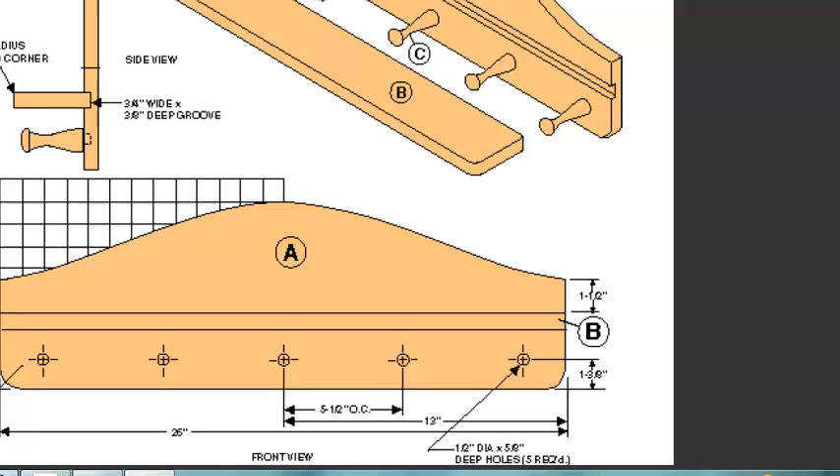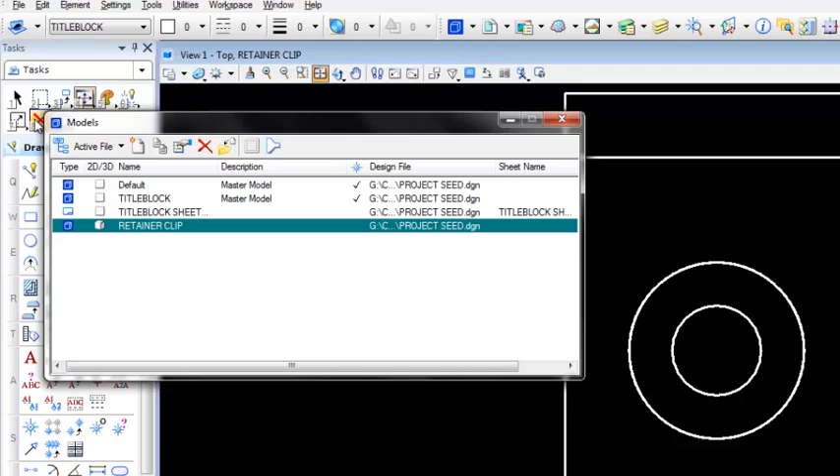I'm going to open up my MicroStation in a project seed file, and I think for the sake of getting this moving along, we'll create just a 3D model. Looks like I already have one here. Let me just see if there's anything in that. No, I think I'll just rename this. I'm going to make sure there's... oh, there is, I think this was one I mistakenly started without. We're just going to rename this to 3D model, that way we can use it whenever we need to.

We'll do a file save, and now we can do a file save as. Our last project was project 7, so we'll call this one project 8.

I'm already in the 3D model, so we'll move up to our solids modeling tool first of all, because most of our drawing tools will be right here anyway. And let's draw in the isometric mode like we did previously, so I'm going to change my view to isometric.

Let's create some new levels. I'll rename this retainer clip to, let's call it, part A, back. And then we'll create another new level which will be part B, shelf, and then part C will be peg.

Alright, so we'll make the back board our initial drawing, and we'll go take a look at our file. We've got 26 inches long. The overall height from the very top to the very bottom is 9.5 inches.

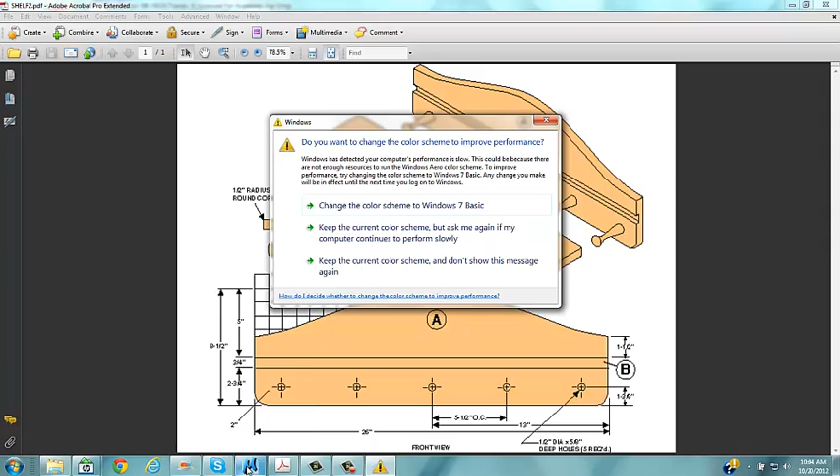We're going to select our slab tool. We're just going to left click anywhere on the screen here. Well, before I do that, let's just double check the design file working units - this is in meters. Good thing I checked. Let's go to fractions. The smallest fraction I see here is probably going to be, let's go to a 1/16 of an inch, just to be sure, and we'll say OK.

Not sure, just do a file save settings. So I want to make sure I remember that that was in meters on my project seed file.

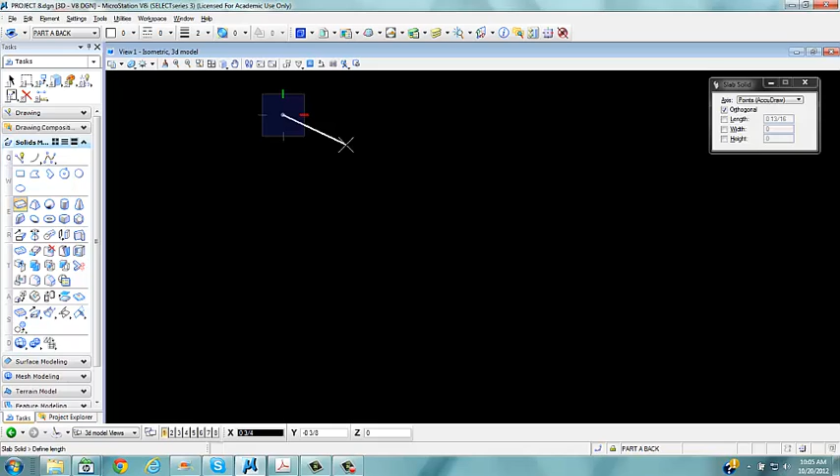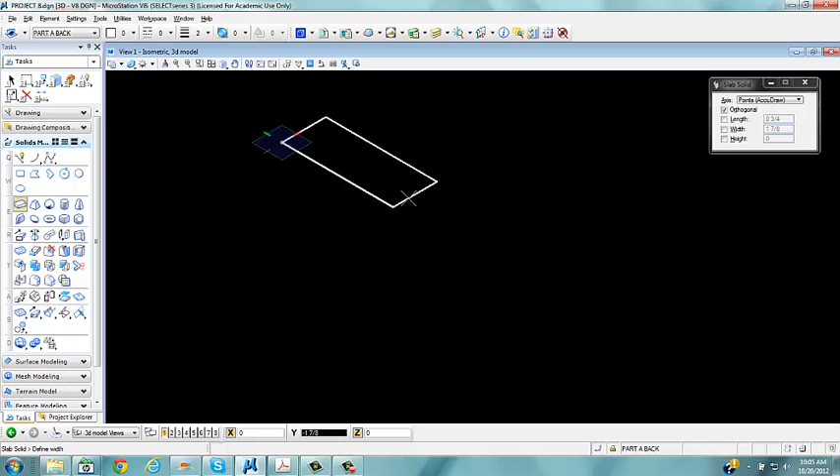I'm going to hit my T key for top. We'll put in the thickness first, just going in this direction, and it's going to be 0.75. Whoops, not sure what I did there. 0.75, there we go. The length is going to be 26, and the height is going to be 9.5.

Do a fit view, so there's the backboard of our object. Now I want to roll this around to a front view. Oops, guess I need a right side view. There we go, so we know we can find the center point.

And if we look back here at this, and I've written some notes out here, but we need to draw this curved line, so we're going to attempt to do that first with a Bezier curve or some type of curve. So we've got a point we're going to start at up here. If you notice, you go over 5 squares, and each of these is 1 inch.

So we go over 5 and down 1 for this point, and then we can go over 3 and down 1 to obtain this point. And then we'll go over 3 and down, say, 1.1. And then we're going to go over 2 and down 0.25. That should give us pretty much this curve.

And this is set up so a carpenter can lay a grid pattern out and kind of find these lines. So it's not exact, it's just kind of a design on the top. So we'll go back to MicroStation.

And let's select a, let's see, probably - let's try a B-spline by points. We haven't used this, but this will kind of give us a nice smooth line. So we'll start right here in our center.

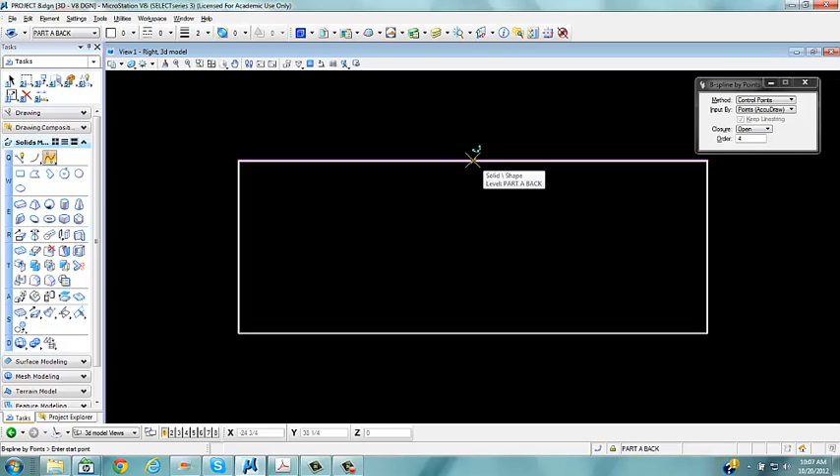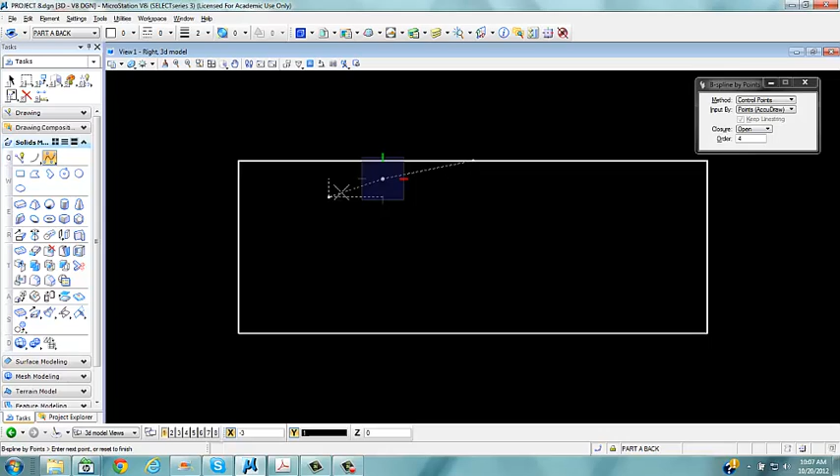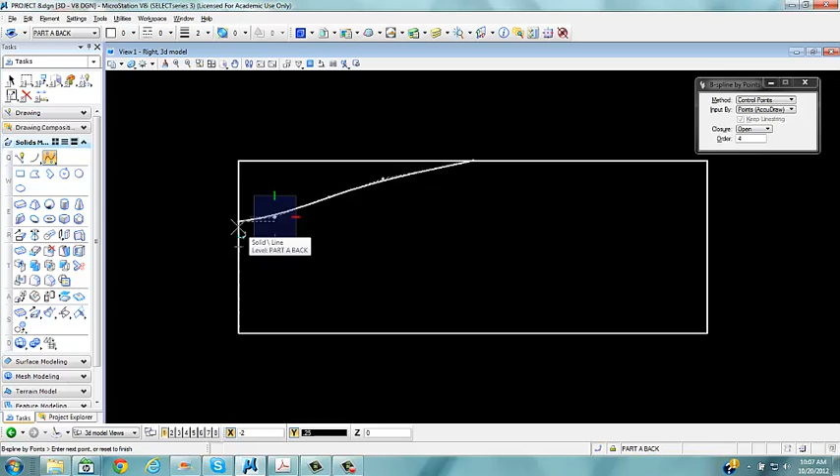And we're going to go over 5 and down 1, left click. Then we're going to go over 3 and down 1. Then over 3 and down 1.1. And then over 2 and down 0.25, left click. I'll extend a line out here and then right click.

So that kind of emulates that line. Now if I take my smart line and connect this point all the way across to the center point, hit the enter key to lock it in.

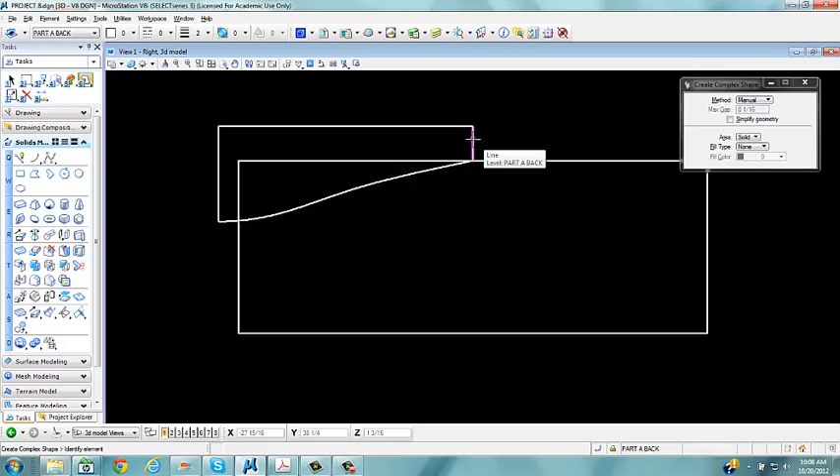And now I can take this and create a shape. We're going to take our 6-3, create complex shape. You can do this manually. I'm going to select this, the curve, this piece, and this piece. Left click. And then take our 3-5 tool, mirror. We want to make sure we do it about a vertical axis and click on make copy.

It's going to kind of give us a little bit of a peak there, isn't it? That's okay, we'll round that off in a minute. So the next thing we can do is boolean those two shapes together in our 2D modeling tools and actually create that as one entire region.

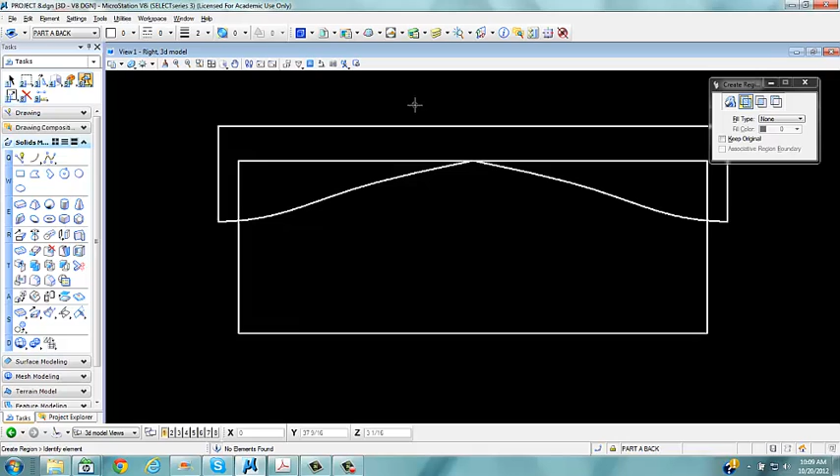If we rotate this back now to an isometric view, we can see our two-dimensional plane and our board, and we're just going to use our T cut solid by curves all the way through. Just left click on the board, left click on the shape, left click again, and it makes that cut.

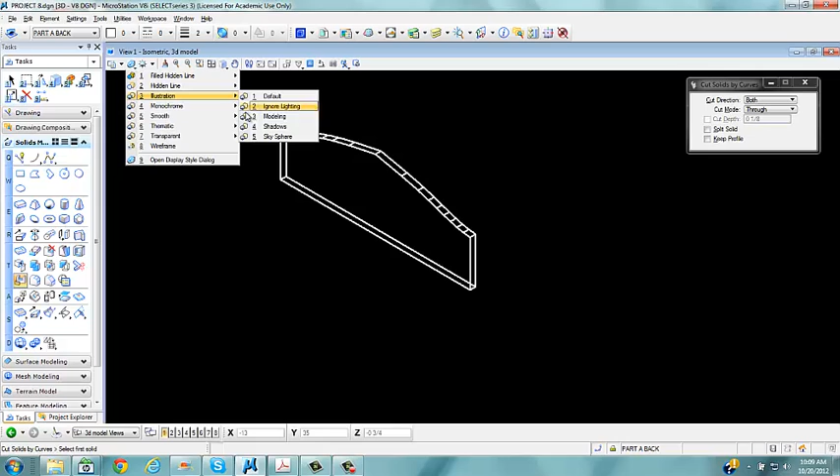Now if we're looking at this in a rendered, say an illustration mode, we can see we've got this little peak on the top. I'd probably change that and maybe put a little radius on that. So we'll use our fillet tool, and let's try a 4-inch radius right on that peak and see what that does.

That's better. So if we rotate it to a right side view, yeah, that wasn't quite enough. Let's try an 8-inch radius. It's going to make it a little shorter, but that's fine. I think that's better, look at it in right side view. Much smoother now, so we've kind of emulated that piece.

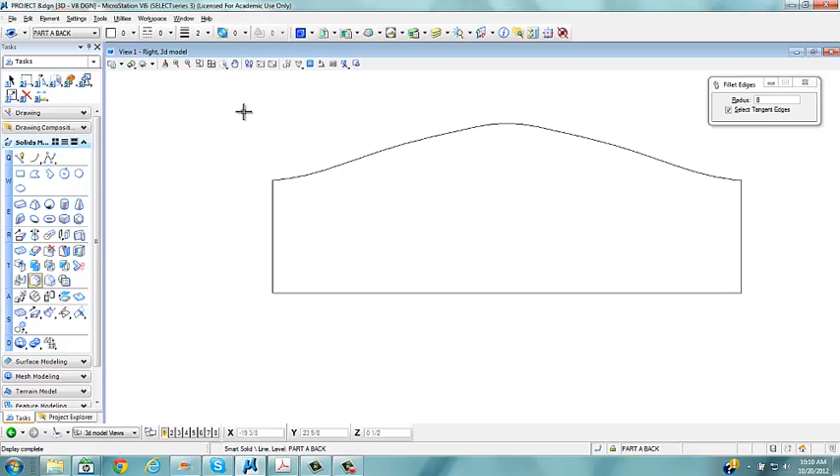We'll rotate it back to an isometric, and we need to cut a slot. If we look at our view, we have a 3/4 inch tall by 3/8 inch deep slot that our shelf is going to fit into.

I think we may need to make an adjustment where we rounded this top off a little bit more. We may have to extend the board down so it becomes the actual 9.5 inches.

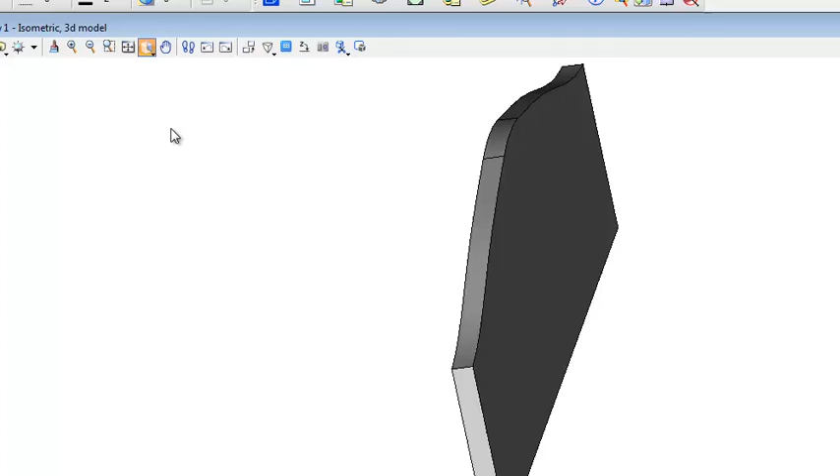So let's go back to our MicroStation. Look at this in a right side view again, and look in wireframe. So I know the distance from here down to the bottom is supposed to be 9.5 inches. And you can see how that extended down below because we rounded this top off, just to make it more accurate.

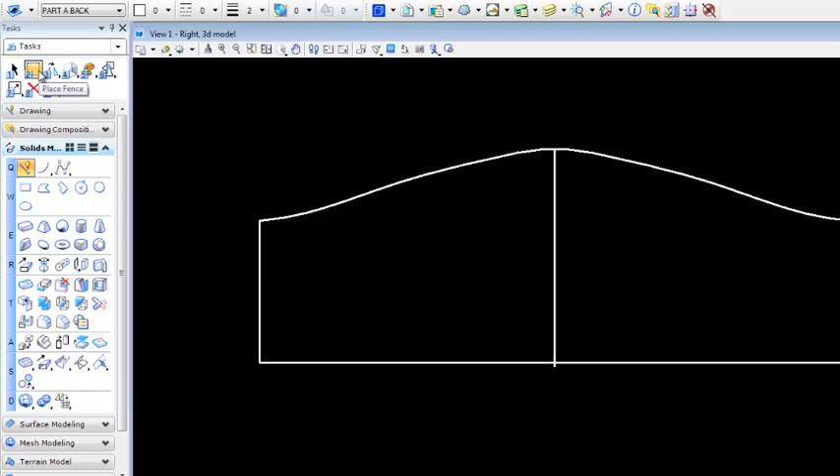Now this is the first time that you'll have used this tool, other than the fact that I may have used it over your shoulder to try to correct something, is your fence tool.

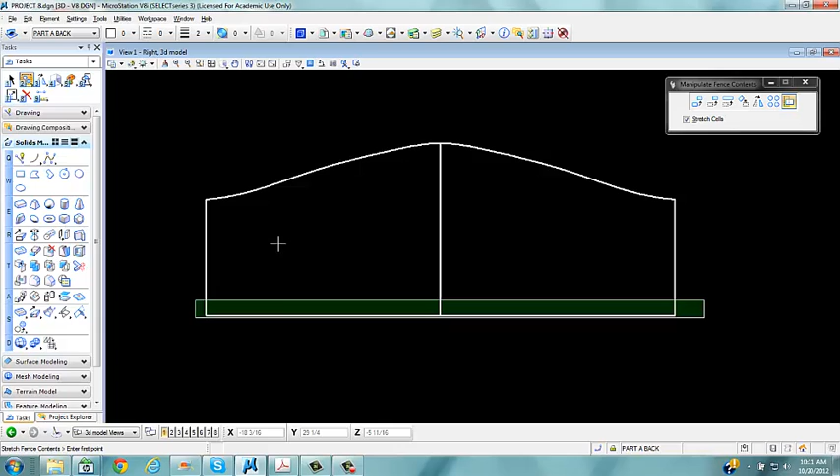We can use this just creating a block, everything on the inside. So I want to create a fence, which is just an invisible line. And what I can use now is a manipulate fence contents, and I want to stretch it. So I can just take this bottom corner, pull it straight down, hit the enter key, and just lock it to this piece. You see what that did is it stretched that piece down.

Now that's one way to do it with a fence and manipulating it within the fence. The other way might be, if I undo that, is just select the object, grab a corner, pull it straight down, hit enter, and then just lock it. And it will do pretty much the same thing. But the fence tool is able to take a specific area and stretch it or copy it or rotate it.

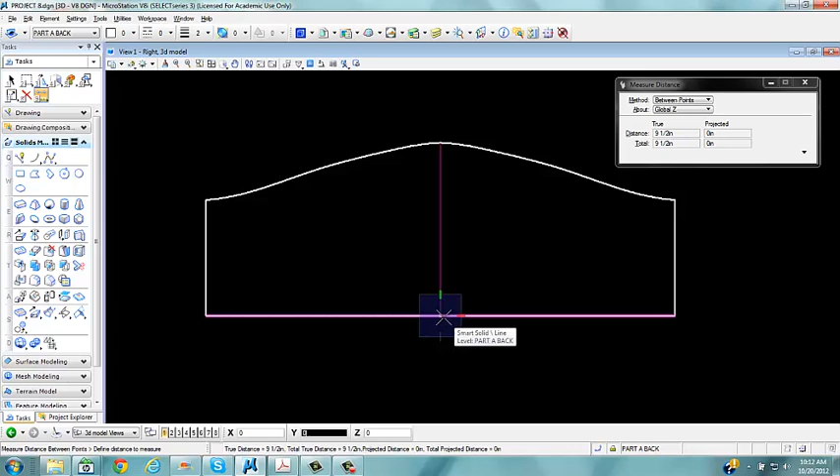So now when we look at the distance using a measuring tool between points from here to here, it's 9.5 inches. So we just made a little adjustment there to kind of make things right.

Let's rotate this back to an isometric, and we'll take our block tool to place a block. Left and right mouse button, tentative point, hit O, and I need to hit F because we're going to go up a distance of 2 3/4 inches.

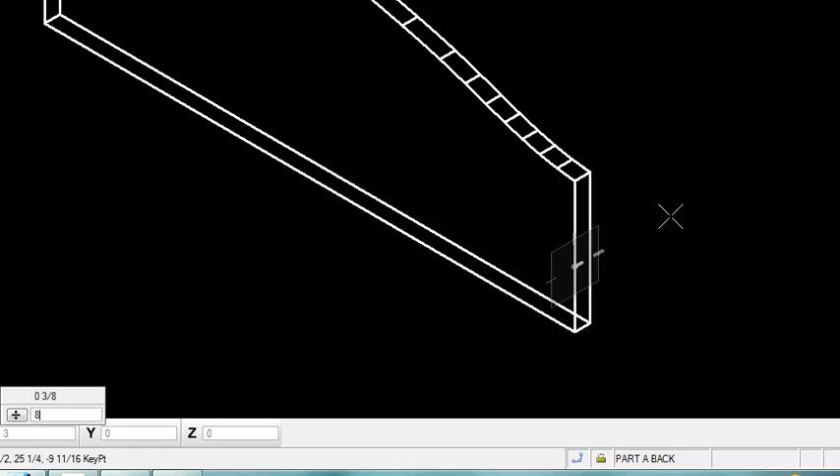2.75. Left click. We know that the distance in is going to be 3/8 of an inch, so I'm just going to key in 3/8. Too lazy to figure out what the decimal equivalent is. Move my mouse straight up, and the height of this is 0.75, 3/4 of an inch.

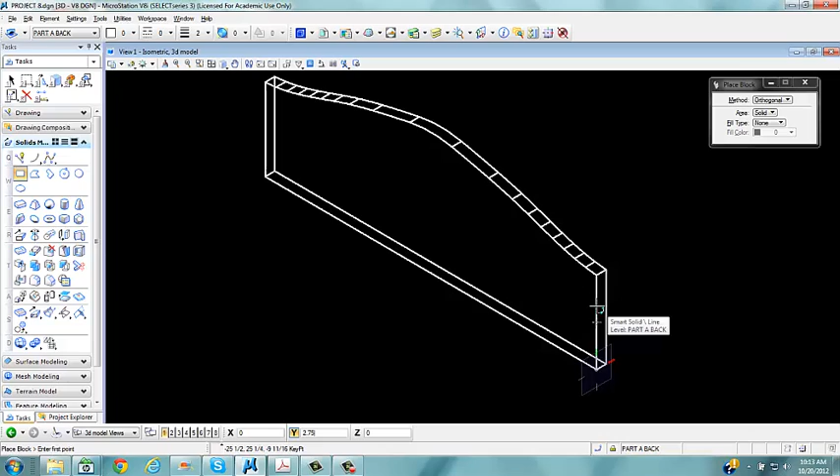Looks wrong. It is wrong. Don't know why. I hit a divide sign, I guess. Try it again. 2.75.

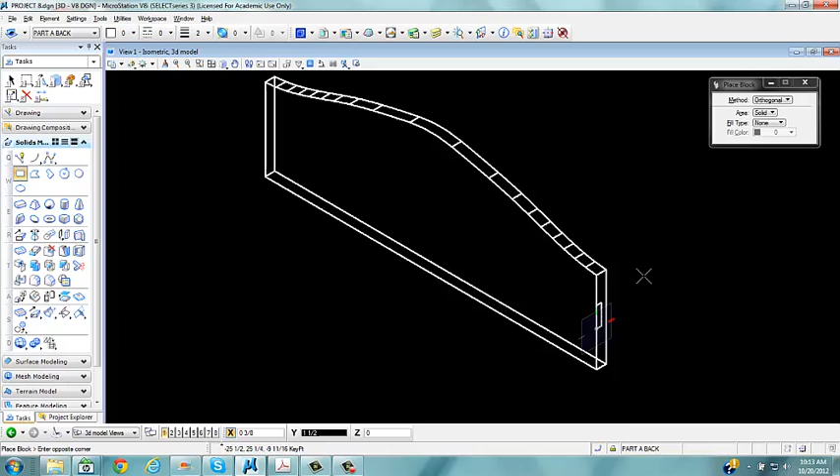And point. Whoops. Stuck down here in the divide. You got to click over into that box. Now key in 0.75. There we go.

That looks better. So now we're going to take that shape, do a cut solid all the way through, this to this, and there's our slot for the board. Now we'll rotate this around to a front view again.

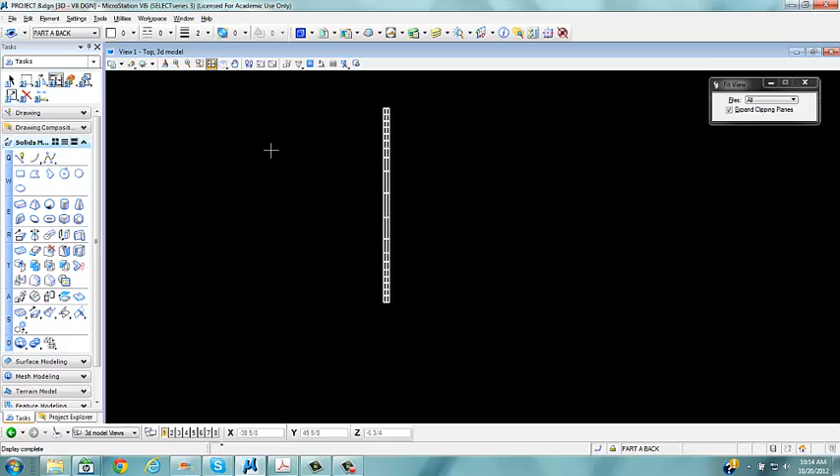Whoops, sorry, keep getting it wrong. Right side view. You know, it'll probably be easier for me to just put this in isometric, and I'm going to rotate this thing 90 degrees.

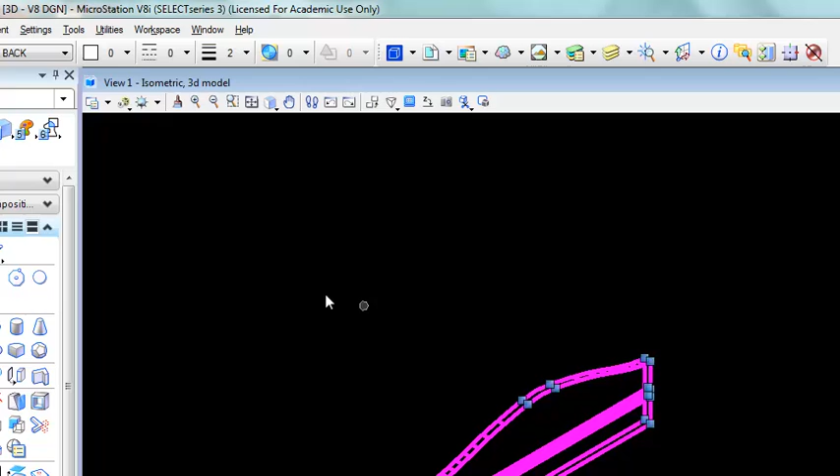Sometimes you have to make sure your compass is right first. There we go. Now when I go to a front view, right side, I'm looking at the face of it. So it's a little more oriented correctly now.

We're going to take our circle tool and find the center point, which is right here. We know those holes are going to be up 1 3/8 inch. So I'm just going to left and right mouse button, go straight up, 1 space 3/8, 1 3/8 inches.

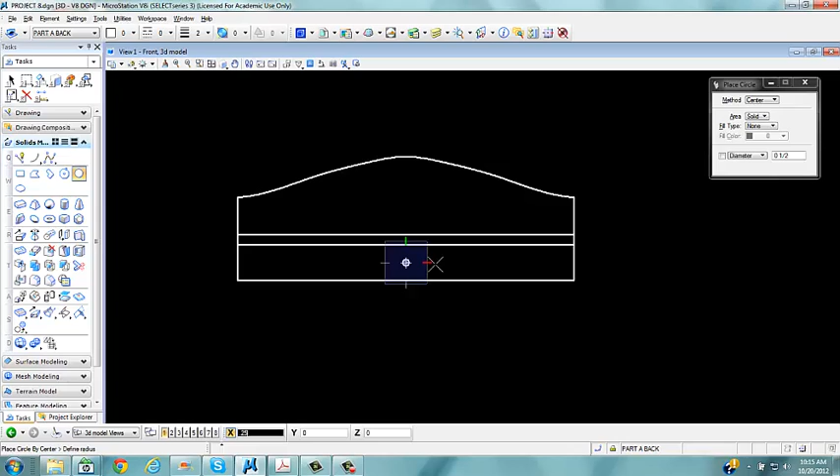The diameter is 1/2 inch, so we're just going to key in 0.25 or 1/4 inch. And those are going to be spaced 5.5 inches on center.

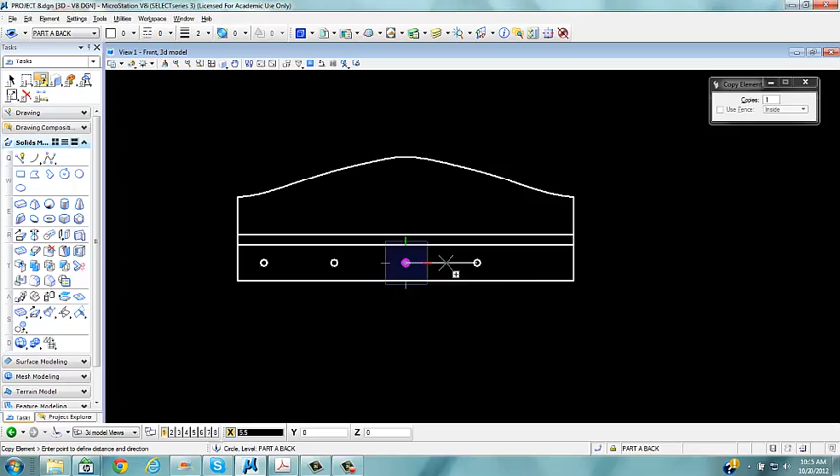So I just take my copy tool. I'm going to copy this 5.5 and 5.5. Same thing in this direction, 5.5 and 5.5. So those are all centered.

We rotate this now to an isometric. What we want to do is cut those holes a distance of 5/8 of an inch deep, so they're not going to go all the way through. Take our cut solid tool. This time we're going to define the depth at 5/8 of an inch.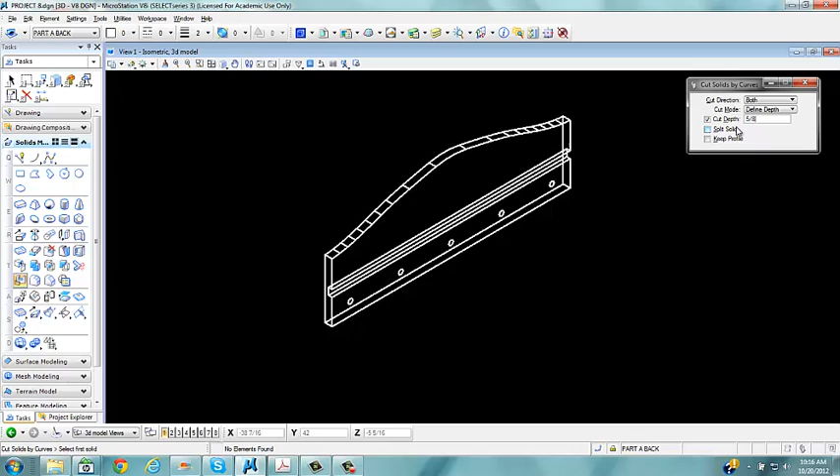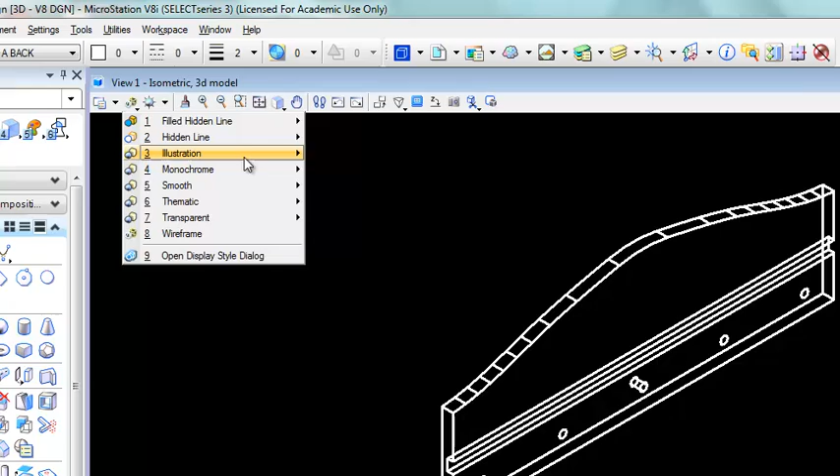Click on the solid. We'll left click on the center one first. You'll see that that is only going to go through part way. We'll check it if we look at this in illustration mode. You can see the hole in the front. We rotate it around to the back, no hole, so we know it didn't go all the way through.

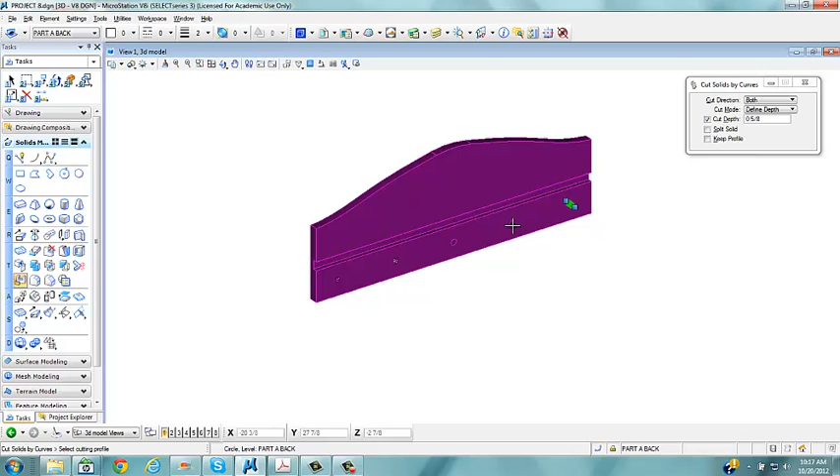I'll leave it in rendered mode, and now just to show you we can do these in multiple. If I select the solid first and then select the first hole, hold down my control key, I can select multiple shapes. Just let go of the control key, left click again. Now we have the holes drilled all the way through the board.

So that almost completes our, we'll go back to an isometric view. The last thing we have is that the bottom corners of this have, looks like, I think it's a 2-inch radius. Should be a note on here.

I'm looking at the view. We know that this radius is 1/2 inch. This says 2 inches, so I guess probably it is a 2-inch radius. We'll try that and see what it looks like.

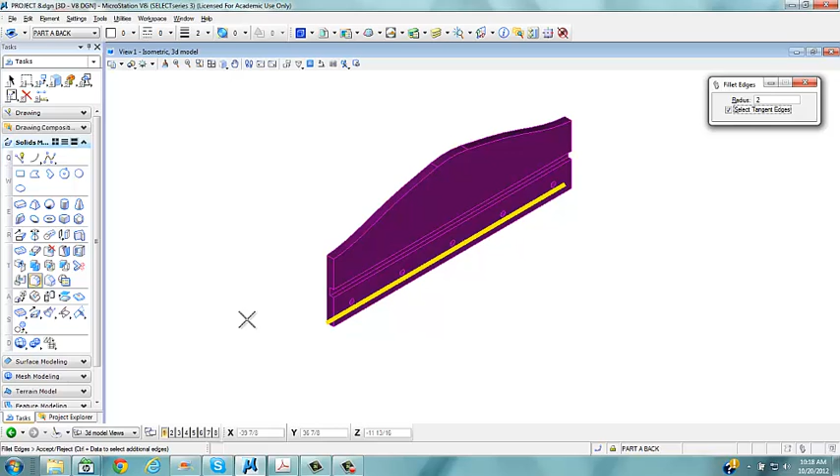So we'll take our fillet tool, select our radius at 2 inches, grab this edge, and you notice the first thing I grabbed when I do this, by grabbing this edge, notice that didn't select. If you just keep right clicking, it'll eventually find the edge you're looking for. That's the edge I want.

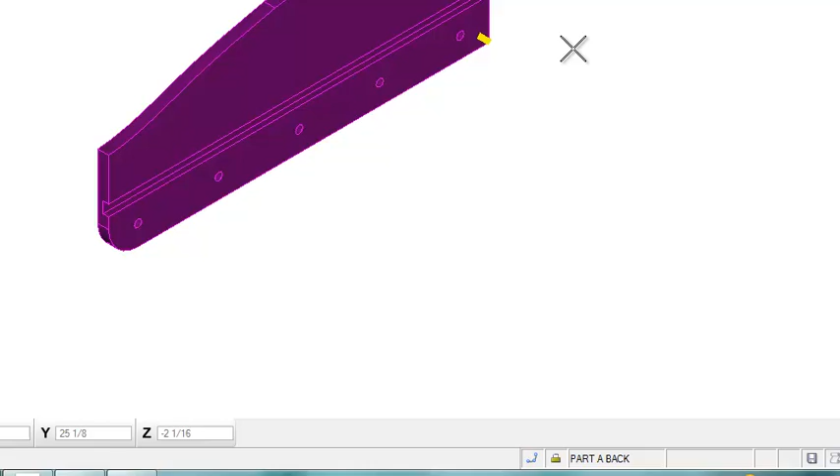Left click puts that radius on there. Again, just keep right clicking. When I see that little yellow bar show, I can radius that up.

Okay, and it looks like it's just square edged on the top. So there's our back panel.

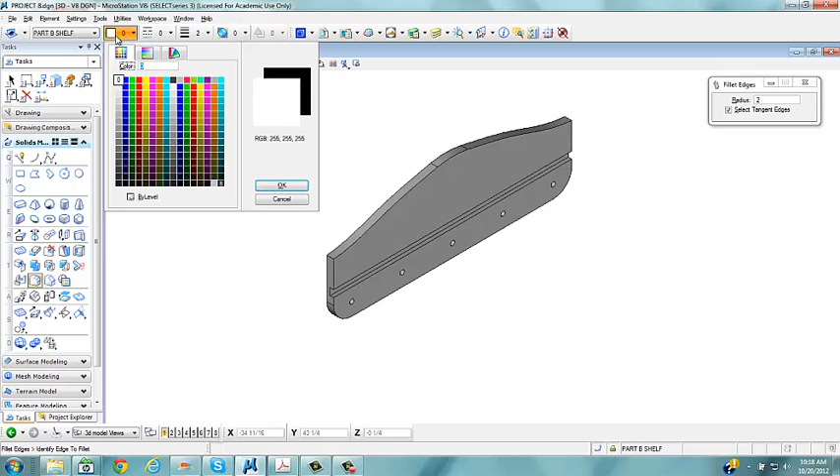Now let's change to our part B level shelf. We'll even do a different color, I'll use color 2, and I don't even care what's on. This is just basically a slab, so I'm just going to start it out here somewhere. It's in the front view, so I know that the length of this is the same length as the board.

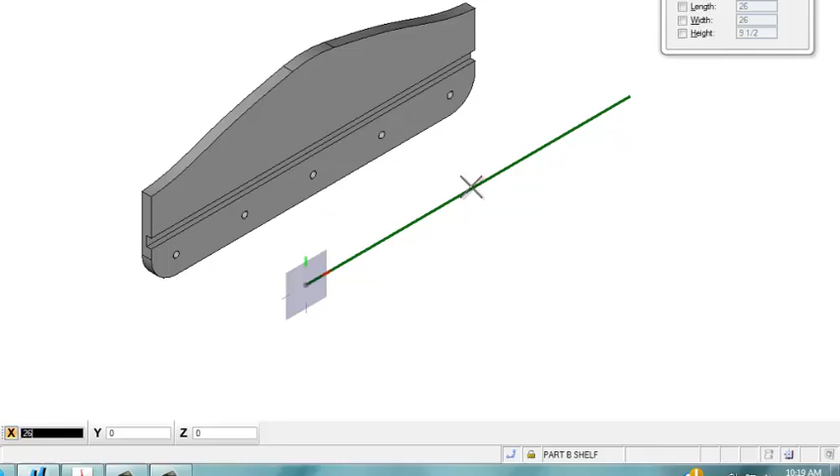The depth is going to be 0.75, or 3/4 of an inch, and the length of this shelf is going to be 4 3/8 inches.

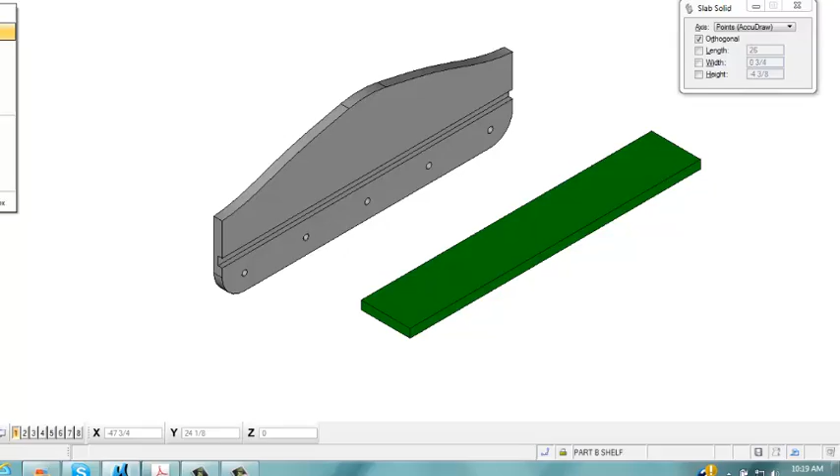If I grab this right by the center point right here and I move it in, I should be able to find that center point and actually lock the shelf in place.

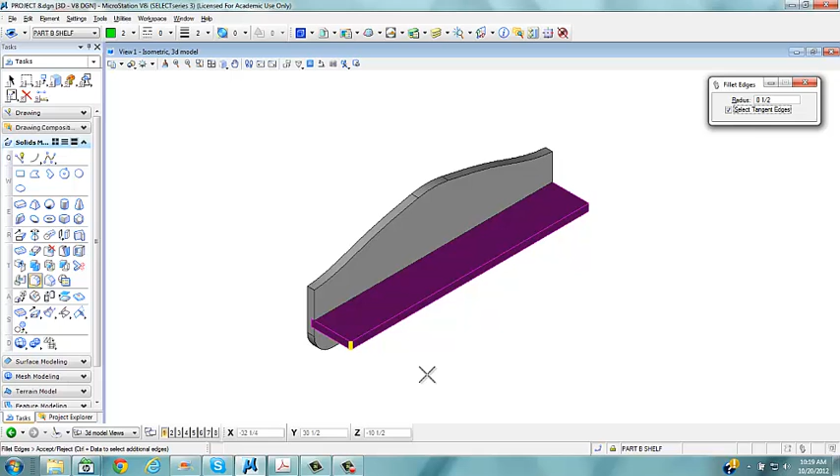We have a 1/2 inch radius at the outside corners, so we're going to take our fillet tool, put in 0.5 for our radius, grab this front edge. Didn't select it until I just keep right clicking until it finds that front edge. There it is, left click.

So that's all there is really to the shelf. We can look at this, see that everything's lined up, looks pretty good.

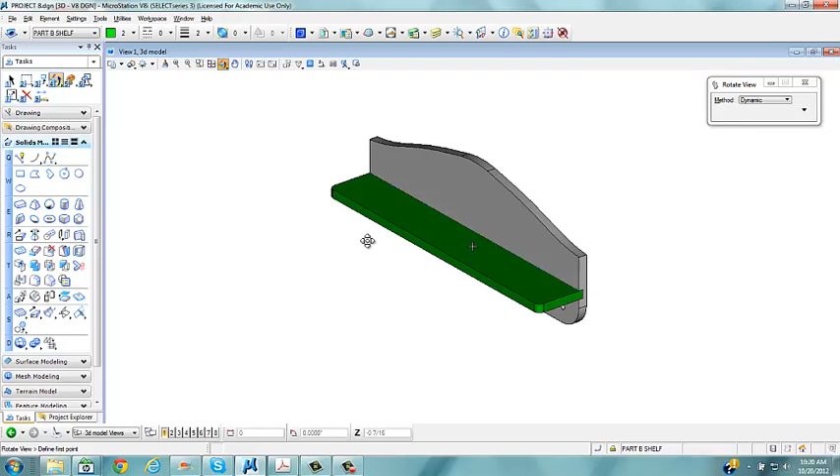So the ability to bring this in and show it all put together, and then when we put our drawings together we can actually separate the pieces out because we're drawing this in separate levels.

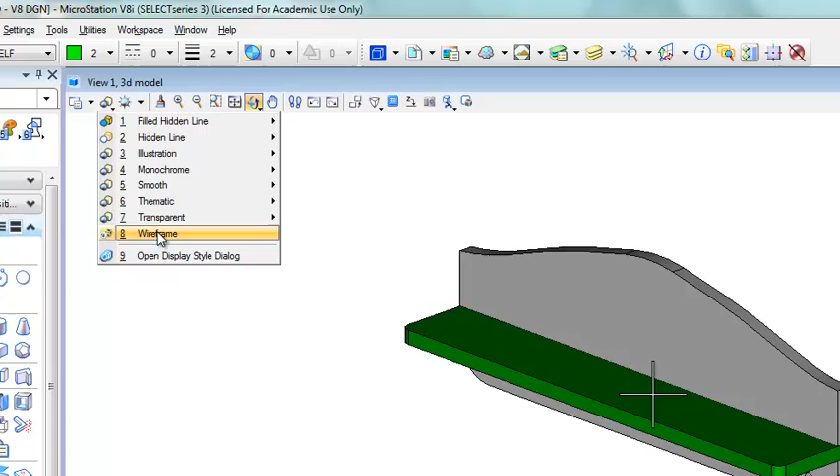Okay, last one, a little more difficult, is the peg. And I haven't done this, so this might be a little trial and error. I may show a different way to do it, but we'll try the simple way first. We haven't really gotten into extrusions yet. I'd like to be able to use that, but maybe not just yet. So we'll just do it with some solids to start with and see what we end up with.

If we take a cylinder, we know we'll start with the base of this, and I'm going to hit, let's change to a different color so we can see things. I got a cylinder. I know that the diameter of the cylinder that actually goes into the board is going to be a 1/2 inch diameter, and it's down in there 5/8 of an inch.

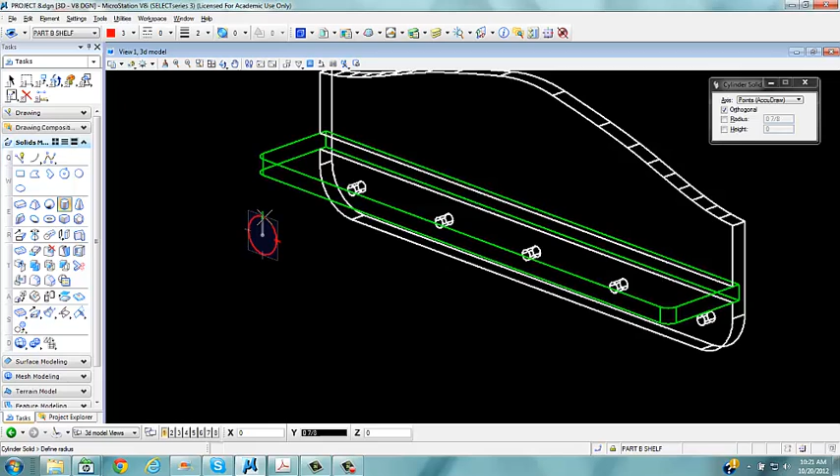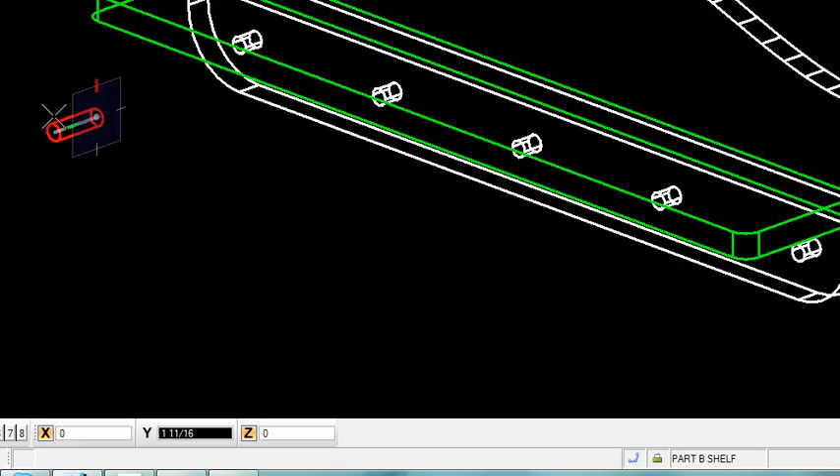So we'll key in 0.25 for radius. We'll put a length on this. I probably want to give it a little bit of space in the back so that it doesn't stick out too far, so let's make it only 0.5 inches deep. So that's the peg part that actually goes into the board.

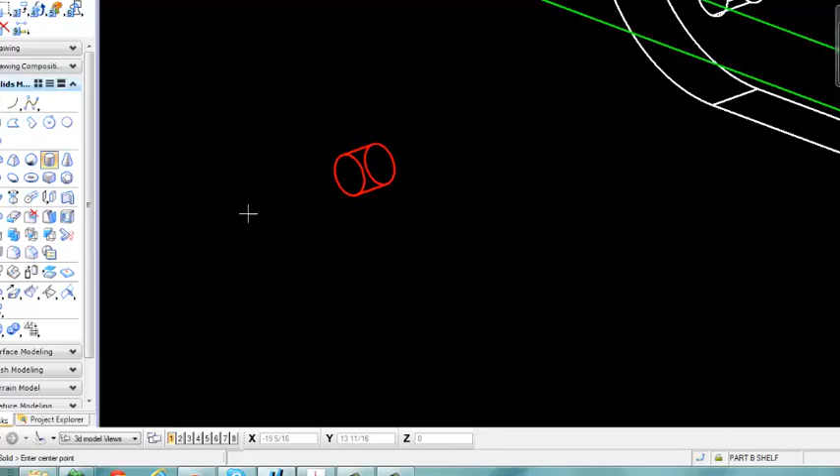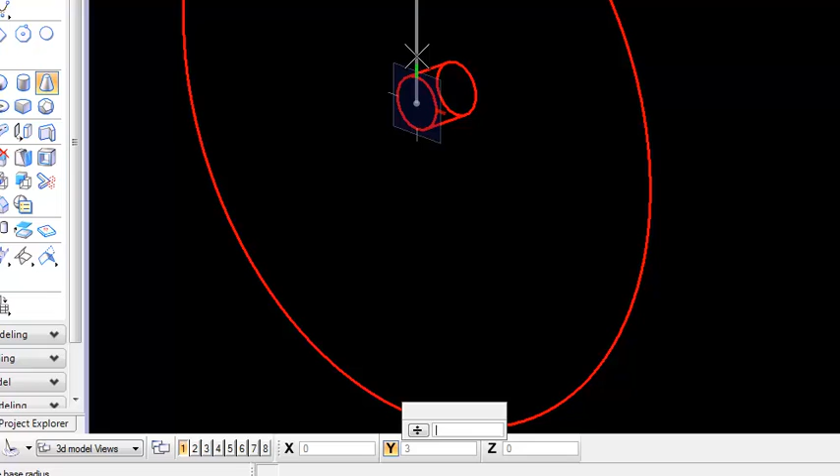Now we know that the thing is about 3.5 inches long from this point on, or actually about 3 inches. So let's make a cone from this point, and we'll go up a distance of, let's say, 3/8. So key in... what am I doing, 3/8. There we go, 3/8 of an inch.

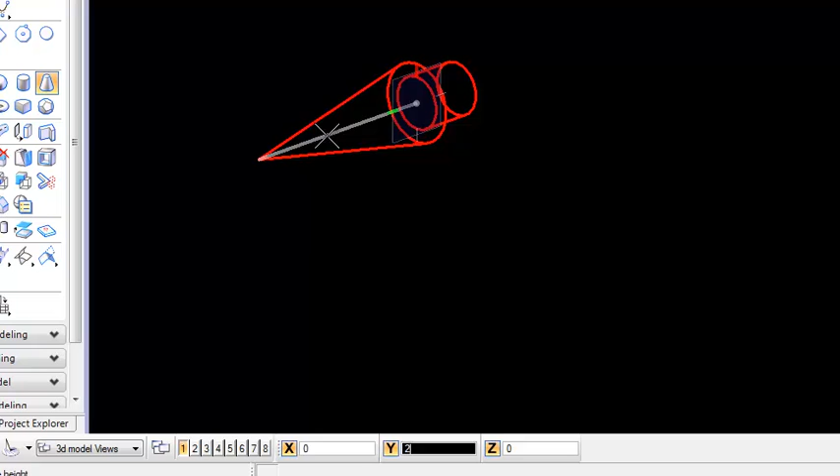We'll bring it out 1.5... let's go 2 inches. And we'll make this part 3/16. Like that, that's the first part.

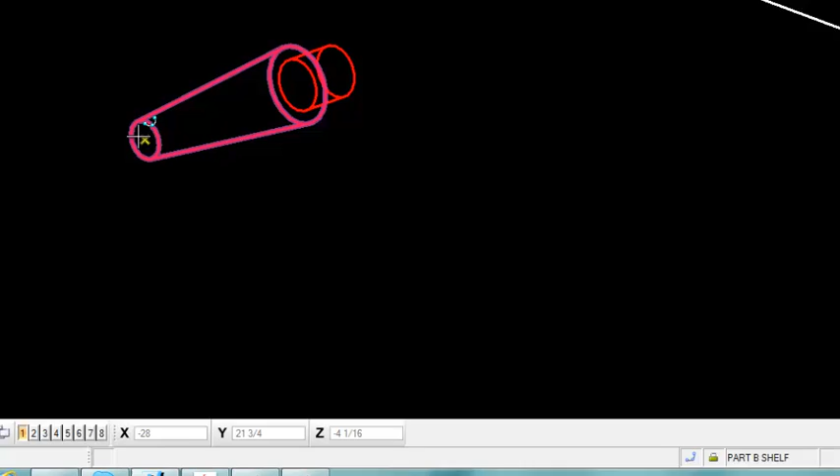Okay, now we're going to do a backwards one. Start at the same point, same tool, use the same radius to start with. Now we're going to pull out the height. Now we used 2 inches, so we're going to go 1 inch out, and we'll make this 0.25.

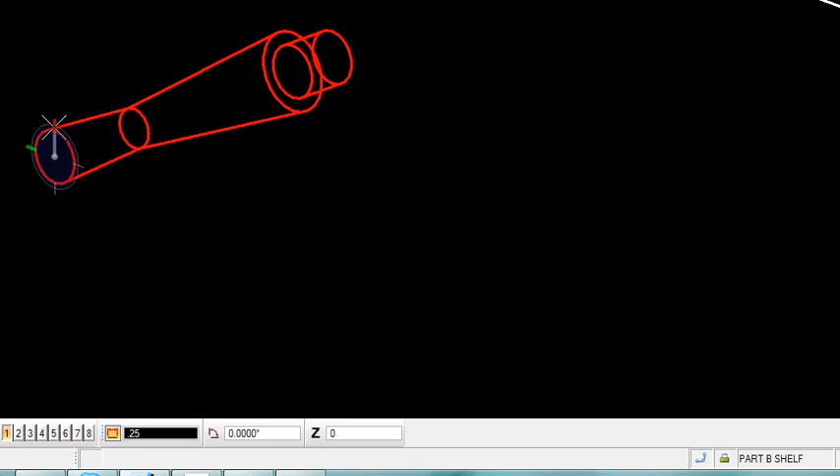Now, if we look back at our image, we see that that peg has kind of this shape, and then at the end it's got kind of a button with a flat back on it.

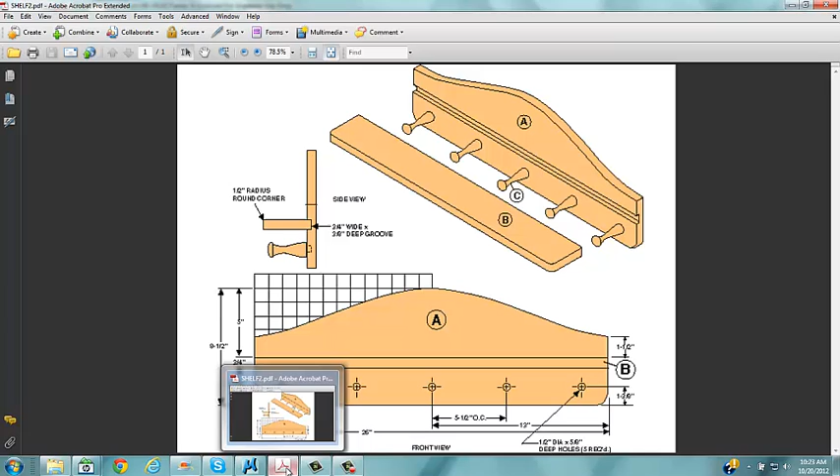Let's try maybe an ellipsoid, and then we'll just flatten the back of it when we're done. So this is kind of an eyeball type thing, but we'll give it a shot. The ellipsoid would be right here, haven't used this much. And we'll just kind of eyeball this.

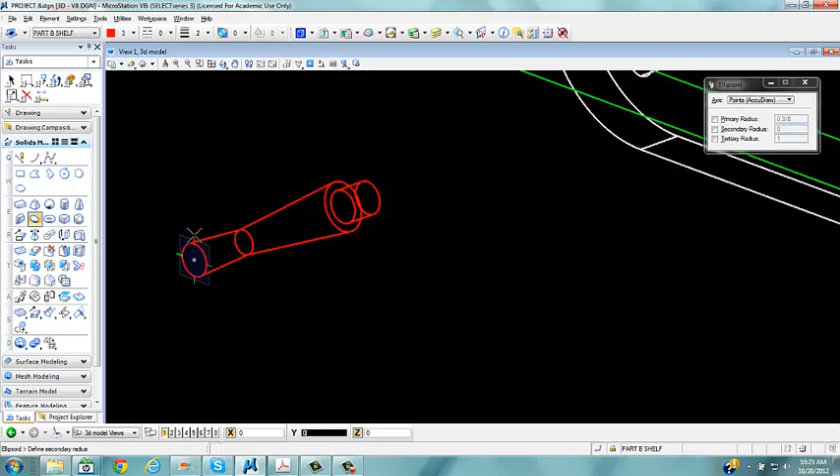We want our primary radius to be 3/8, secondary radius to be 3/8, and then we'll put in... we'll try 1/8.

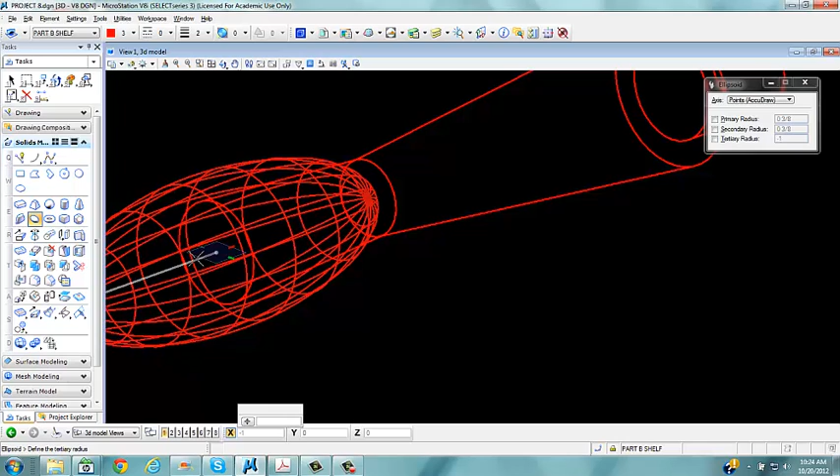Now we rotate this to a front view. Oops, right side view, sorry, I flipped it.

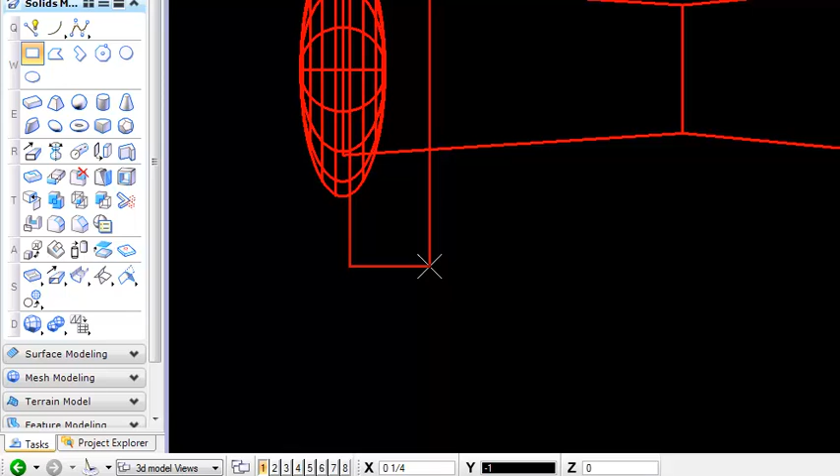It's pretty close, but what I want to do is just take a rectangular shape, and I can just eyeball this right across the back end, and I want to cut the solid. This time we're going to go all the way through the object using this as my solid, this is my cutting plane. So it's going to give me that flat back that's going to kind of hold the clothes on.

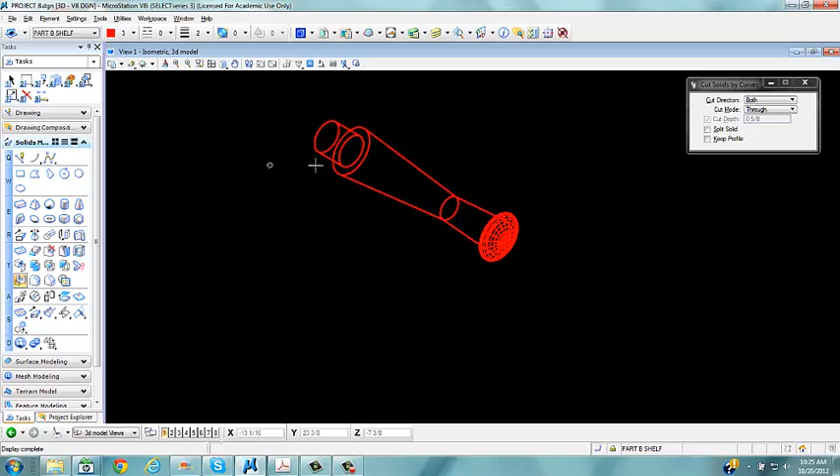So with this in place, we'll look at this in isometric now. I want to Boolean all three of these shapes together. This one to this one, hold down the control key to that one, and then we'll go this one to this one, so it's all one piece now. And let's look at it as an illustration, you can see it's a little...